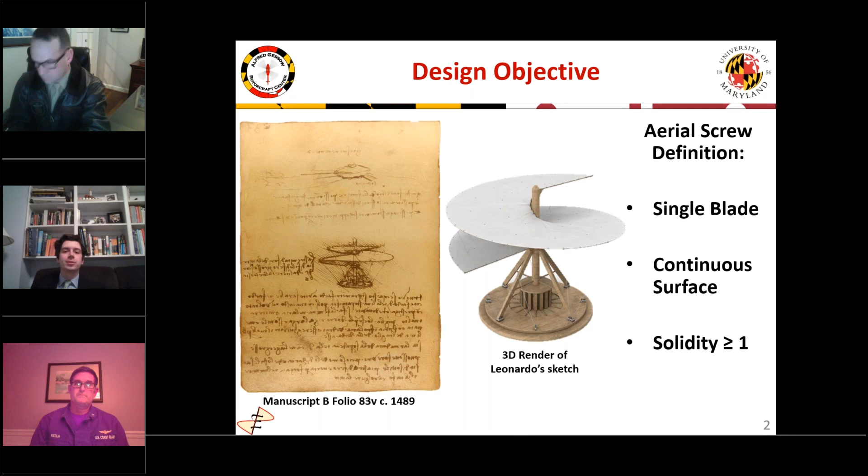The final vehicle was required to rely on one or more aerial screws for lift and thrust. The aerial screw is defined as a single-bladed rotor with a continuous surface and solidity equal to or greater than 1. Besides these constraints on the rotor, no other constraints were placed on the other systems to perform the mission.

While previous challenges have focused on challenging missions like reaching the top of Mount Everest, hovering for 24 hours, or flying on Mars, this year was solely focused on demonstrating the feasibility of an aerial screw for stable flight. So the mission is designed to simply demonstrate stable hover and forward flight.

The prescribed mission was to carry a 60-kilogram human passenger or pilot, take off and hover at least 1 meter off the ground for 5 seconds, cruise at least 20 meters over the course of 1 minute, before hovering for another 5 seconds and landing safely. The total flight time is 70 seconds with a distance of 20 meters.

But our design is capable of more than double each of these small requirements in payload, range, and endurance.

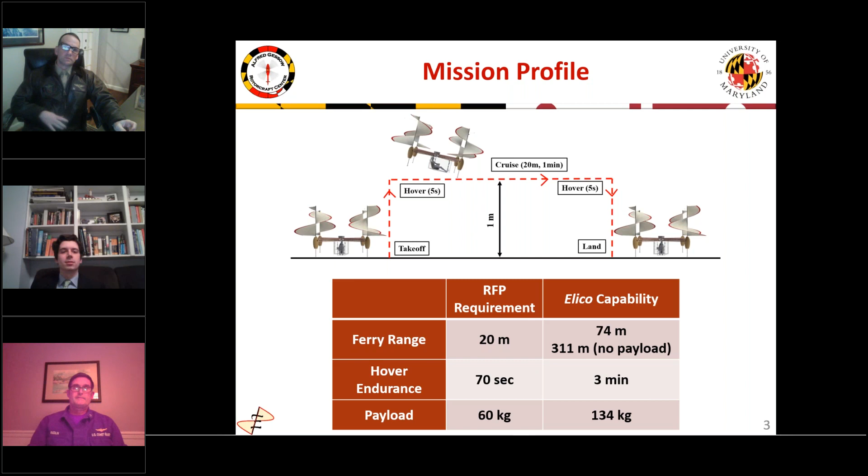The first step of this process was to determine the vehicle configuration. The initial concepts were divided into two groups. First, we had rotor configuration concepts, which were focused on ensuring the vehicle has the required anti-torque to hover through most conventional rotor configurations.

A single main rotor with a tail rotor could be considered because the RFP only called for aerial screws to provide lift and thrust, while the tail rotor could provide control. The second group of concepts was focused on vehicle control itself.

Conventional swash plate controls can't be considered because the aerial screw rotor doesn't lend itself to that geometry. Even conventional collective control is impossible because changing the pitch of the screw, how high or short it is, changes the surface area and would rip or tear at any surface.

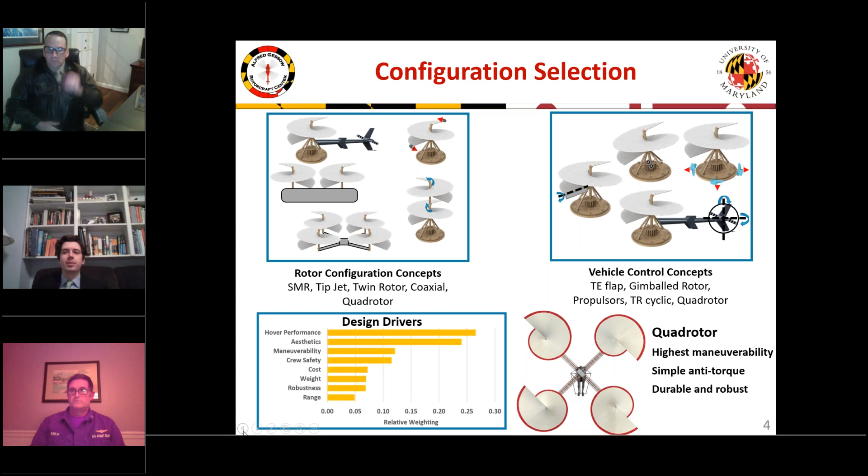So instead, some creative alternatives were considered: placing the entire rotor on a gimbal, adding aerial screws on each side as propulsors, adding cyclics to the tail rotor placed off axis, and the most promising, placing a trailing edge flap on the bottom edge of the rotor. But since little is known about the actual operating physics behind the aerial screw, it's hard to evaluate how effective this would really be. So based on our design drivers, we decided on a quad rotor configuration, which had the highest maneuverability and a simple anti-torque solution while being durable and robust.

Here's an overview of the final design for Elico. Just like the aerial screw itself, Elico derives its name from the root word for helicopter, helix, and screw in the Italian language. It has a maximum gross takeoff weight of 600 pounds, and each screw has a tapered radius out to a maximum of 4.8 feet. Due to the tall rotors, it stands over 11 feet tall with a footprint of 424 square feet. So it's overall a relatively large vehicle, but extremely light.

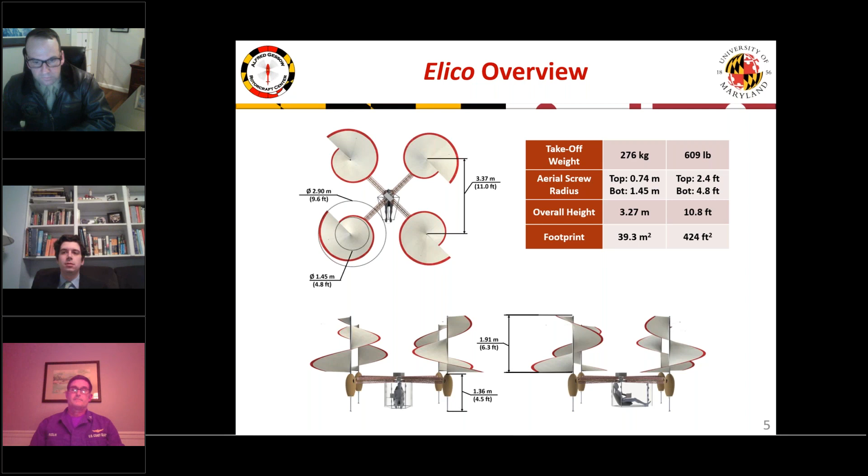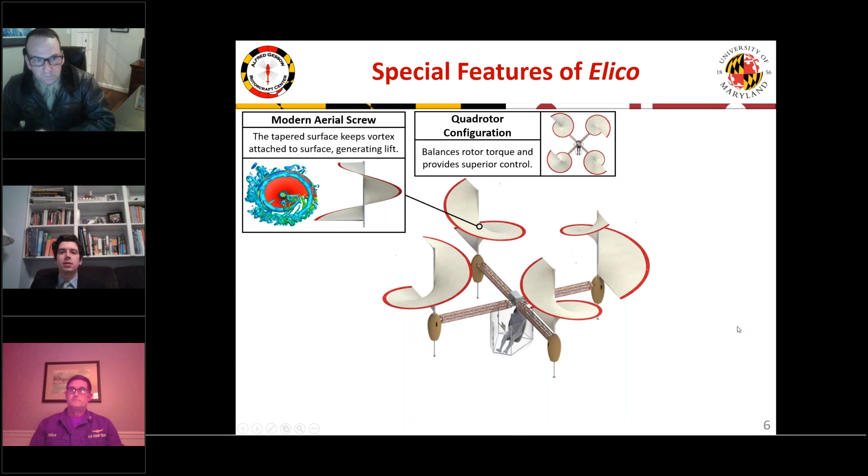In addition to the quad rotor configuration, Elico relies on a modern aerial screw design for all lift, thrust, and control in flight. Each rotor is attached to a set of ultralight support arms consisting of a cellular truss to minimize structural weight. Each of these components has a modular connection to allow for upgrades as the technology develops. Elico features an all-electric power plant system for efficient power supply to the rotors, allowing the rapid RPM control required for flight. Lastly, Elico can perform its mission completely autonomously with pre-programmed waypoints.

But the heart of this design is the evolution of the aerial screw. Our design philosophy was to make as few changes as possible to the original sketch, to create an effective rotor while maintaining the elegance of the original concept.

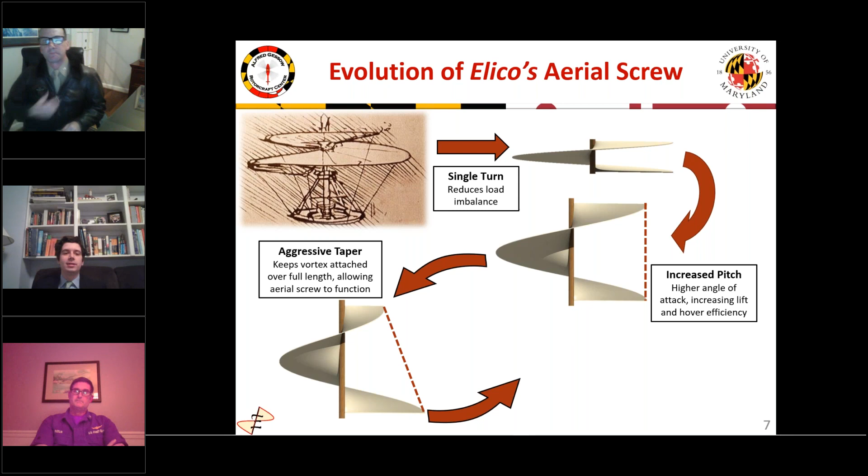The first step of this is reducing the screw to a single turn to reduce the load imbalance, then increasing the pitch for higher lift efficiency, followed by an aggressive 1:2 taper ratio, which is the real key to this design — I'll touch on more in a few slides. Lastly, Leonardo's wood and linen materials were modernized to aluminum, carbon fiber, and sailcloth to minimize weight while maintaining structural integrity.

The biggest challenge of this design was understanding where in the design space we could even land. This is a completely novel rotor geometry that has never been tested before. Going into this, we had no idea if the aerial screw could generate any thrust at all. There's no such thing as an airfoil, chord length, or angle of attack here, so BEMT, blade element momentum theory, or other preliminary analysis methods are not an option.

Instead, we had to parametrically evaluate a range of options to understand if a screw can provide any meaningful thrust. This was an ideal use case for 3D printing, as it allowed our team to rapidly prototype many designs with changes to the number of turns, the screw pitch, the taper ratio, dihedral angle, and the placement of a winglet at the tip.

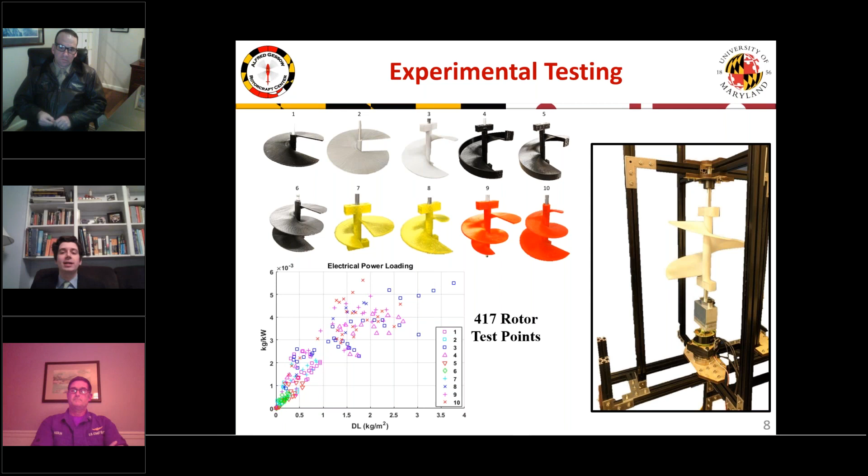Before the labs closed in March of this year, we were able to obtain 417 rotor test points to help further our design. While this testing was able to show the efficiency of the screw design, we're still lacking an understanding of the physics behind it.

So for this, we took our four highest performing experimental rotors and ran high fidelity CFD analysis. It was through this analysis that we found the lift generation is not through the rotor pushing air down, as Leonardo initially thought, but instead there's a vortex generated at the leading edge of the screw, and by tapering the rotor, you can ensure it stays attached to this surface and generates a low pressure zone, fully generating the lift along the entire surface.

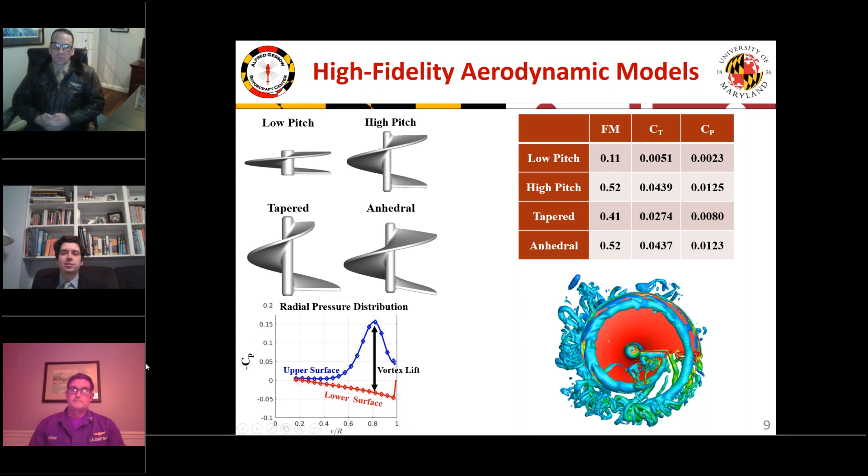So with that knowledge, the final rotor is a single turn that stands 6.3 feet tall and starts at a radius of 2.4 feet, tapering out to a full 4.8 feet at the bottom. When rotating at 367 RPM, it generates up to 152 pounds of thrust and requires 67 horsepower.

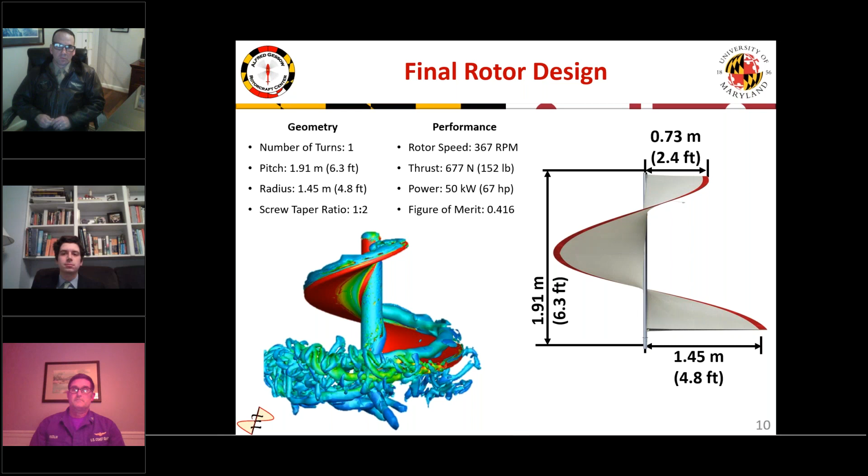Now that we understand the aerodynamics of the rotor, we need the structure to support it. The rotor is comprised of a hollow aluminum shaft and 5 carbon fiber spars, each individually sized for the unique loading conditions they experience. Two carbon fiber helixes act as ribs as they sweep around. The spars are attached to the shaft through a titanium bracket, and the entire surface is wrapped in a high-performance sailcloth material.

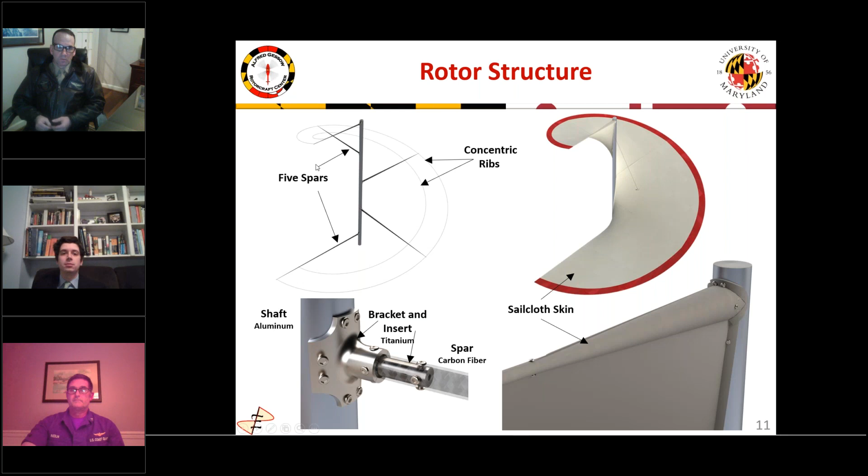However, one of the most important concerns for any rotor, especially one as asymmetric as the aerial screw, is ensuring its balance. Due to the extreme height of the rotor and the asymmetric lift distribution from the taper, the rotor generates very large 1-per-rev inertial and aerodynamic moments. This caused many of our experimental rotors to break at the base of the shaft, so we wanted to look into this very deeply.

We were able to solve this by placing a centrifugal counterbalance to oppose this moment at the operating RPM. By placing about a quarter pound mass 1 meter from the shaft, we're able to effectively cancel all 1-per-rev moments at the operating RPM.

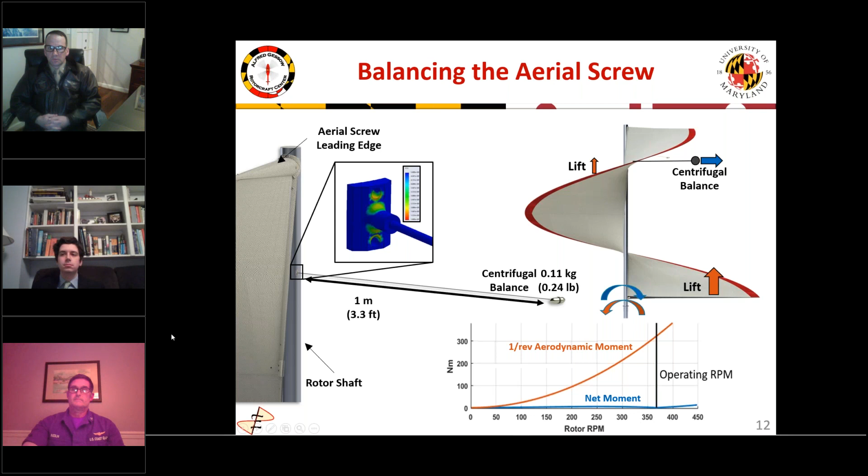Now, the rotor itself is attached through a set of thrust bearings, lift struts, and flex couplings to a 2-stage gearbox, which is then driven by an EMRAX 188 electric motor operating at over 95% efficiency. The motor is powered by state-of-the-art LiPo batteries, all tucked into a nacelle directly below the rotor. Each screw has its own set of batteries to reduce the cable weight stretching along the arms.

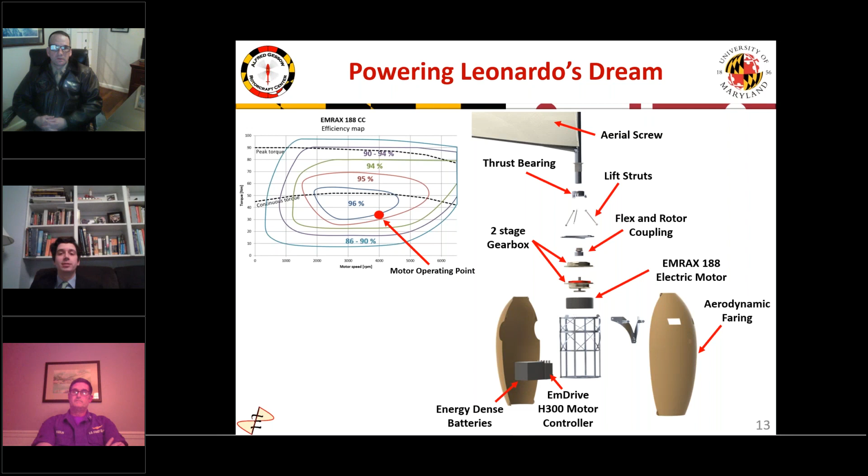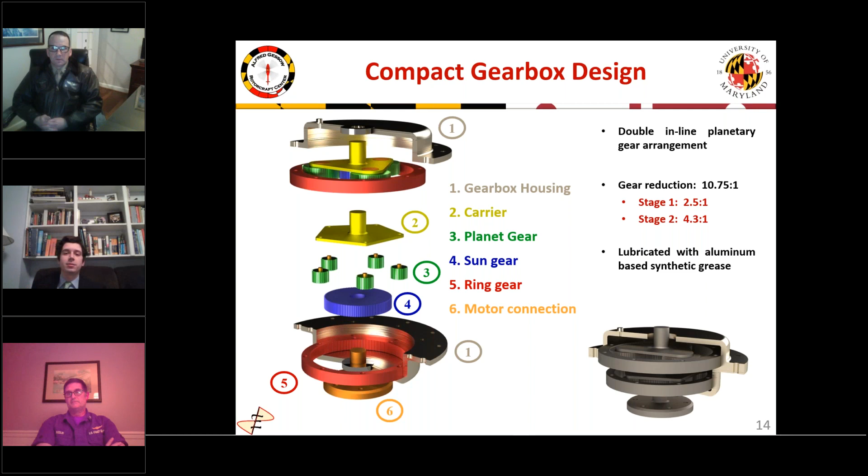The gearbox itself is a double inline planetary gear arrangement, since the motor is in line with the rotor shaft, and it's designed to convert the 4,000 RPM at the motor to 367 RPM on the shaft, with a significant step up in torque.

Each nacelle is attached to an ultralight support arm consisting of a triangular configuration of an intricate pattern of carbon fiber cellular trusses. Each arm, although over 6 feet long, weighs only 15 pounds. A detailed finite element analysis was performed to ensure a factor of safety of at least 1.5 in buckling and a natural frequency of 2.5 per rev to avoid resonance with the rotor.

At the other end, the support arms are connected to the central truss shown here. It's a triangle of aluminum tubing with bolted attachments to each arm. And directly below this central truss is the pilot seat.

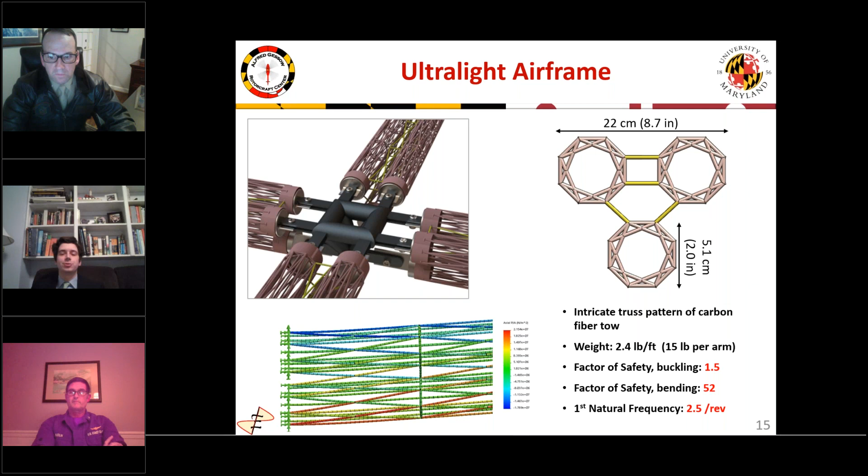The pilot sits in a fully transparent cockpit directly below that structure, protected from the rotary downwash. In that cockpit, there's a multifunction display to input waypoints pre-flight or to monitor Elico in flight. The pilot has a full field of view, blocked only by the front nacelles, which can be augmented with external cameras.

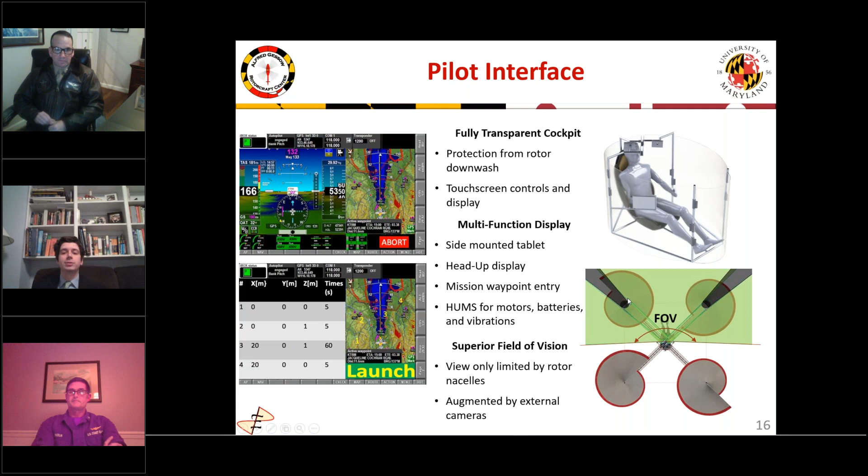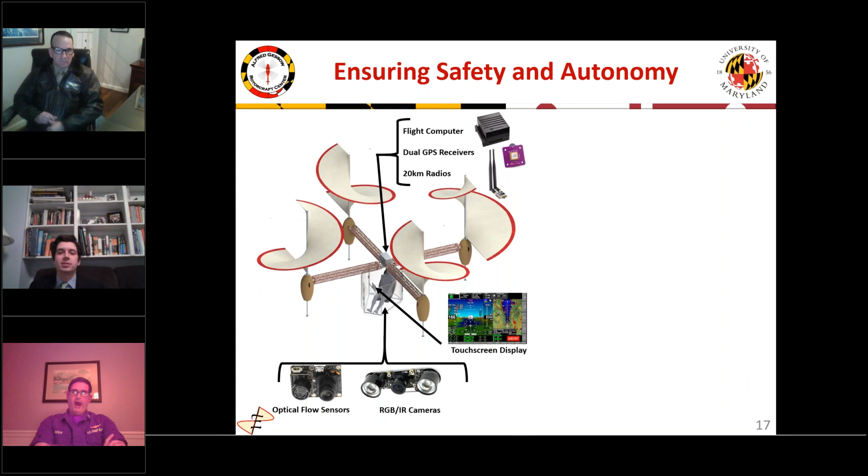There's an array of cameras and sensors placed around the vehicle for safe flight, to ensure Elico is aware of obstacles on the ground or in flight. The central computer, GPS, and radios are housed in the central truss, and on each nacelle is Lidar for landing, IMU for vibration monitoring, as well as sensors for the batteries, motor, and rotor RPM to provide feedback to the flight controller.

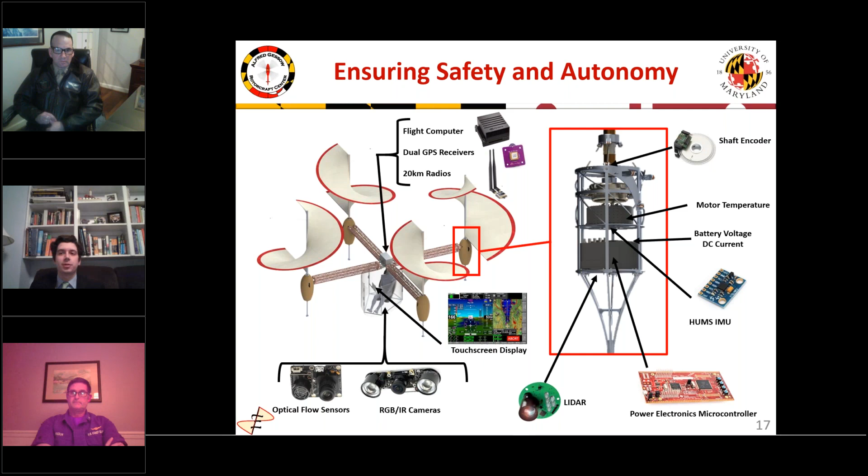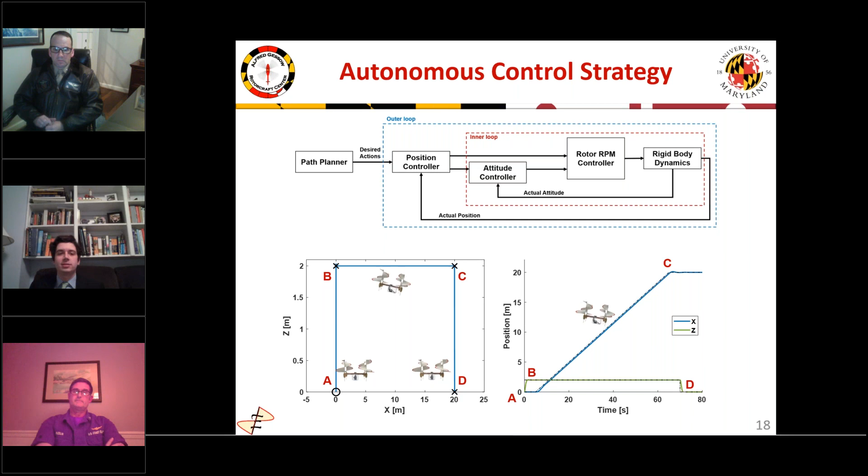This flight controller consists of an inner loop for attitude control and an outer loop for position control, which is fed by the pre-programmed waypoints in the path planner. You can see below that there's little deviation from Elico's actual flight, the dashed black lines, to the design mission, the solid lines.

Overall, Elico is designed with safety in mind. Its low disk loading allows for 25 knot downwash near the pilot and on the ground, which is equivalent to a strong breeze on the Beaufort scale. The monopod landing legs are designed to absorb up to 4G hard landing loads and a 1G side load.

The all-electric power plant reduces vibrations and improves controllability. And lastly, in case of emergency, these motors can be driven to a zero torque state and allow, due to these large, heavy inertial rotors, an autorotative index of 27, exceeding requirements for modern helicopters.

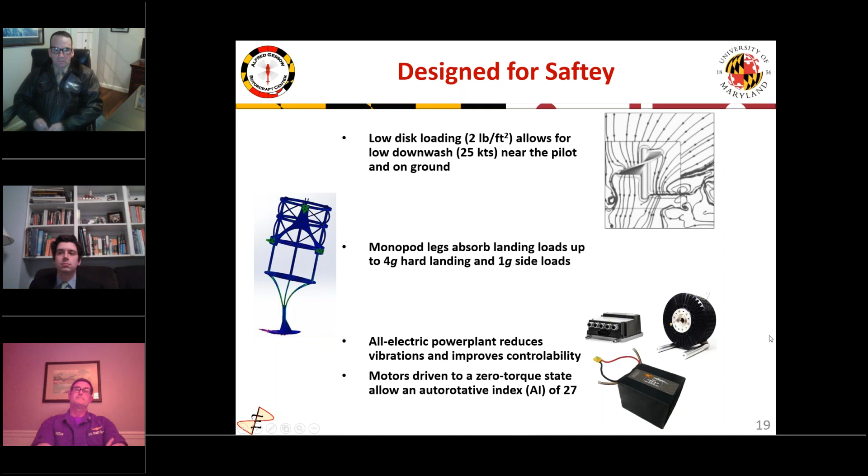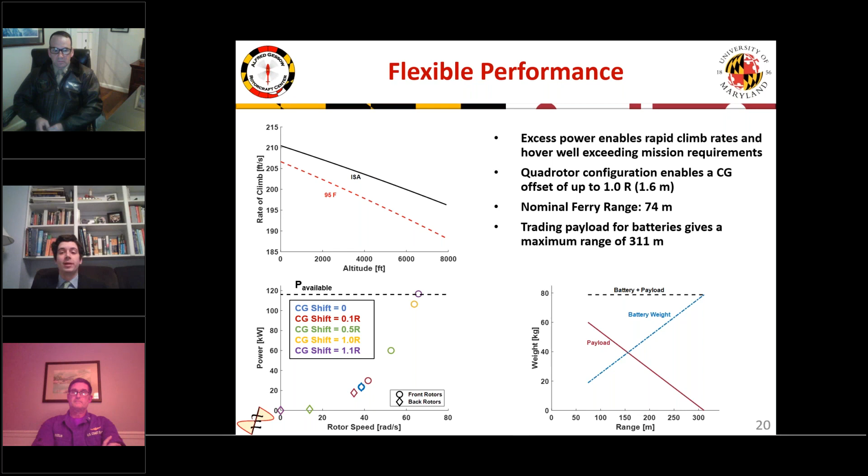In terms of performance, Elico has enough excess power installed to allow for rapid climb rates well exceeding mission requirements. The quad rotor configuration enables a CG offset of up to 1 rotor radius from the center of the vehicle. And while the nominal range of 74 meters is already nearly quadruple the requirement, you can trade payload for battery weight to give a maximum range of 311 meters.

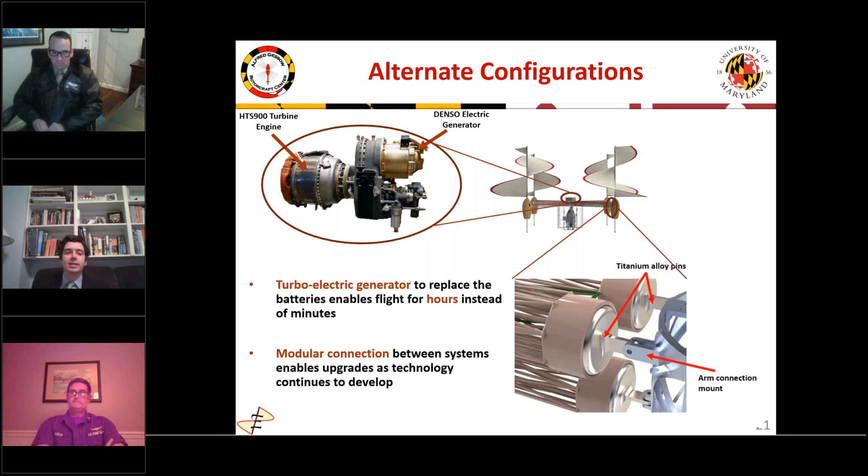If even greater range or endurance is desired, these batteries can be replaced with a turbo-electric generator to allow Elico for hours and miles instead of minutes and meters. Additionally, as the aerial screw and other technologies develop, the modular connections allow for systematic upgrades.

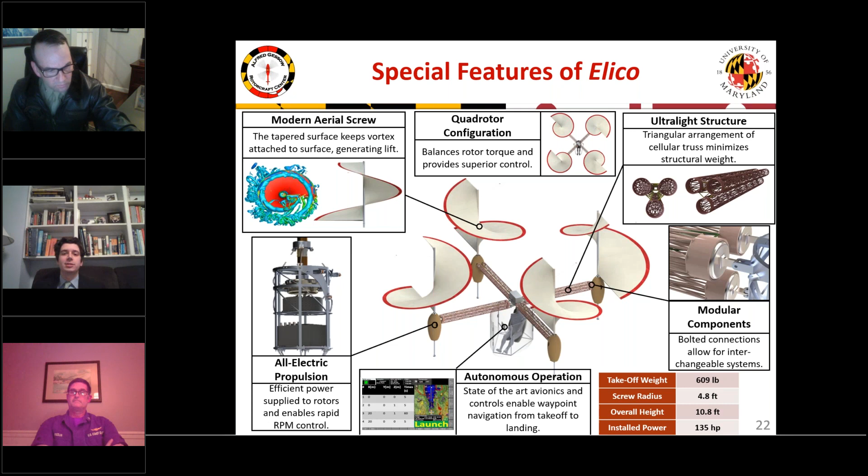In conclusion, through a culmination of ultralight structures, efficient power plants, and a parametric study of aerial screws, Elico revolutionizes Leonardo's initial sketch into a modern and incredibly capable design.